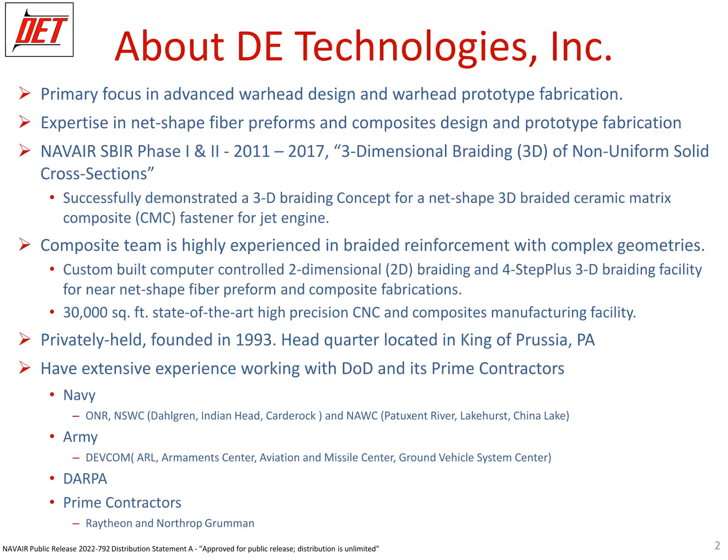In response to the U.S. Marine Corps' needs for damage-tolerant rotorcraft components without stiffness and cost penalty for the H-1 light attack helicopter, and also a high-performance structural composite for other air platforms, our approach is to apply the 3D braiding concept that was used in the development of the ceramic matrix composite fastener by scaling up the equipment and process to suit larger components for rotorcraft.

The requirement for the Phase 2 program is to demonstrate the feasibility of net shape or near net shape fabrication of rotorcraft components with damage tolerance and high stiffness. In this case, the tail rotor flex beam was selected as a demonstration article, and the ability to automate and scale up the process for manufacturing is also exercised.

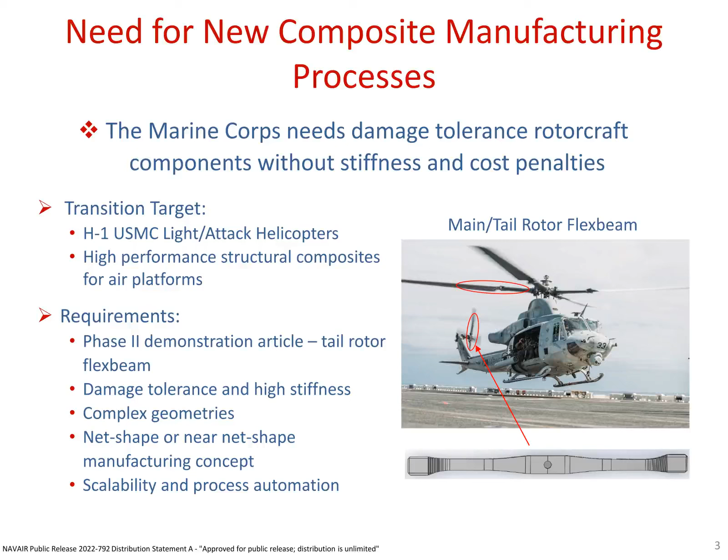So why is a 3D braided composite flex beam better than the baseline laminated composite flex beam? It is because 3D braided fiber architecture has through-the-thickness fiber reinforcement, and therefore has greater structural integrity, typically damage tolerance and stiffness. This technology is highly suitable for application in the DoD and prime contractors, where low cost, high performance composites are needed.

With 3D braiding, the fiber preform is braided in near net shape and consolidated into composite using the resin transfer molding process. The only machining involved is cutting the center hole and trimming to length, whereas the baseline laminated flex beam is made from unidirectional fiber. Laminated composites are known to delaminate due to lack of reinforcement in the thickness direction.

Furthermore, the manufacturing process of laminated composites is rather costly. The process involves stacking layers of unidirectional prepreg. Depending on the thickness and complexity of the component, the number of layers can vary from several hundred to a couple thousand. Generally, a rectangular composite block is made, then machined into the desired shape. It is a time-consuming process and creates a lot of waste.

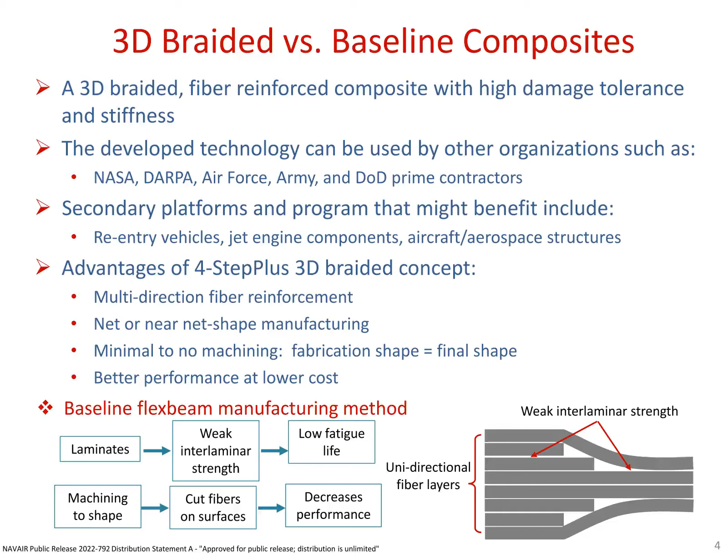During service, the flex beam is subjected to a complex stress state, which includes axial, torsion, and bending. Now, with our 4-step plus 3D braiding concept, these properties can be achieved by varying the fiber ratio between the axial and through-the-thickness directions, and also the fiber orientation, to achieve any specific performance requirement.

The ability to incorporate multi-direction fiber, use of dry fiber, and minimal machining lead to a low-cost composite flex beam with high strength and stiffness, and also good damage tolerance and enhanced fatigue life as compared to existing flex beam design.

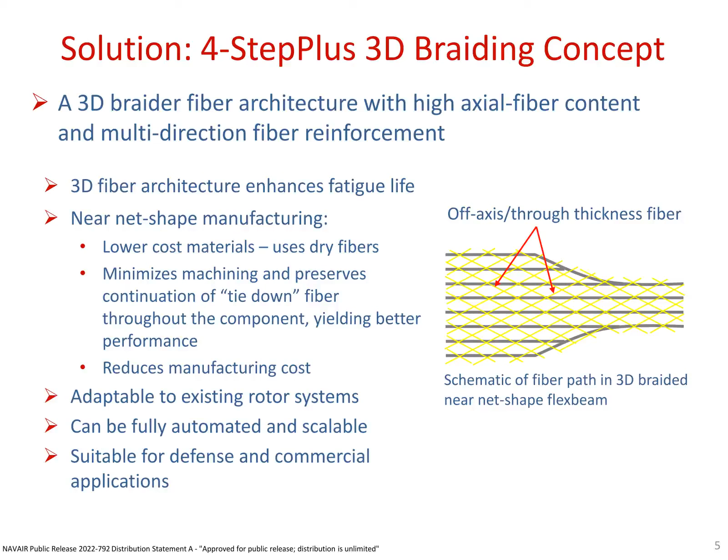At this point, we are near the completion of the STTR Phase 2 base program. In the earlier program, Phase 1, we successfully demonstrated the concept via the fabrication of a subscale prototype 3D braided composite flex beam, and that work has been carried into the Phase 2 program, where material design development and evaluation were performed. The developed 3D braided composite has an axial property comparable to the baseline material.

The flex beam design and structural analysis is complete at this point. A computational model for a full-scale flex beam prototype tail rotor is also generated. Currently, a 3D braided preform for the flex beam is being fabricated. A Phase 2 option program is expected to be awarded in the spring of this year. The option program task includes flex beam performance optimization and fabrication of a full-scale prototype 3D braided composite flex beam.

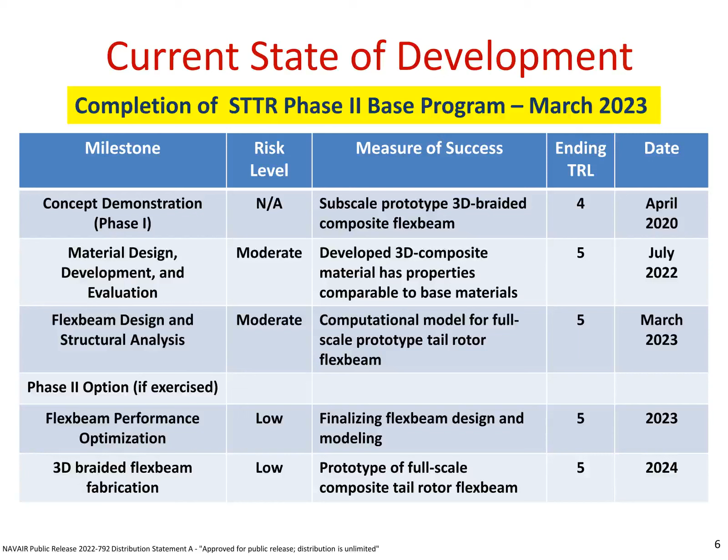In summary, 3D braided composite flex beam has many advantages over current laminated flex beam design and manufacturing. With 3D braided fiber architecture, there are many variables that can be varied to achieve any specific requirement at lower cost than existing technology in terms of design flexibility, near-net shape manufacturing, multi-directional fiber reinforcement that lead to good damage tolerance and extended fatigue life.

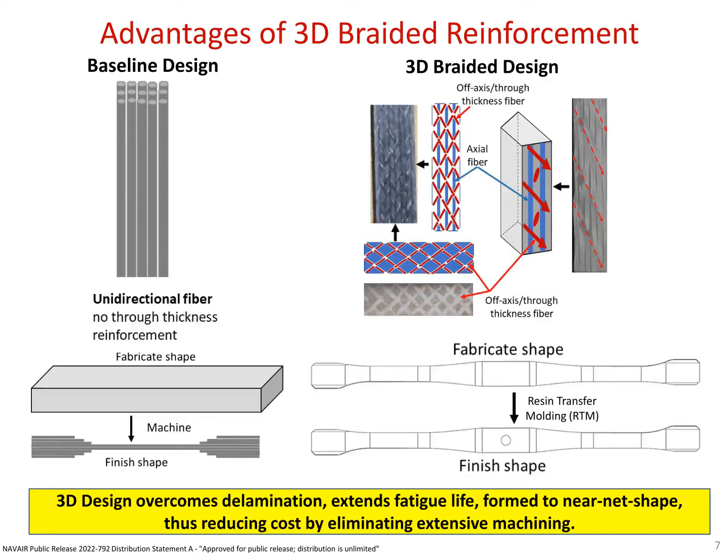We have demonstrated our technology in Phase 1 and Phase 2 through the design and fabrication of a 3D braided composite flex beam. So what's the next step? The next step is to seek funding opportunities to design, manufacture, and test full-scale 3D braided composite components in actual systems. Also, customize a prototype flex beam for the U.S. Marine Corps H-1 helicopter and other military or commercial helicopters or air platforms. Fully automated braiding equipment and process for manufacturing, as well as scale-up for production.

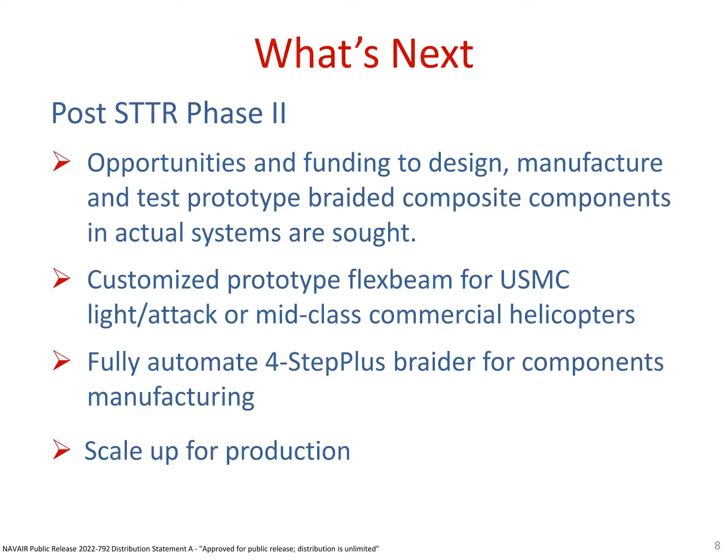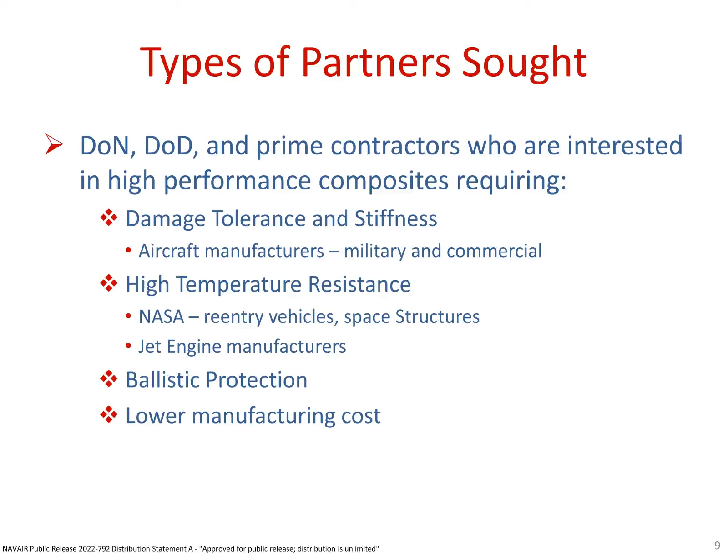We are also looking to partner with the Department of the Navy and other agencies in the Department of Defense and prime contractors who are interested in low-cost, high-performance composites requiring damage tolerance and stiffness, high-temperature resistant applications, and ballistic protection. The anticipated role of DE Technologies is the supply of 2D and 3D braided preforms and composites, strategic partnerships, and technology support. For over 20 years, DE Technologies has supplied the U.S. Navy and the Department of Defense with braided preforms and composites, precision metal products, and ballistic engineering support.

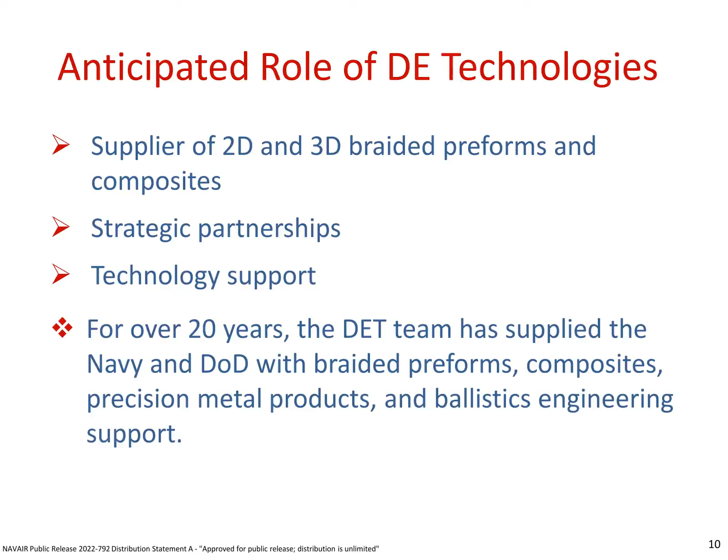I hope this presentation provides a better understanding of our 3D braiding technology.